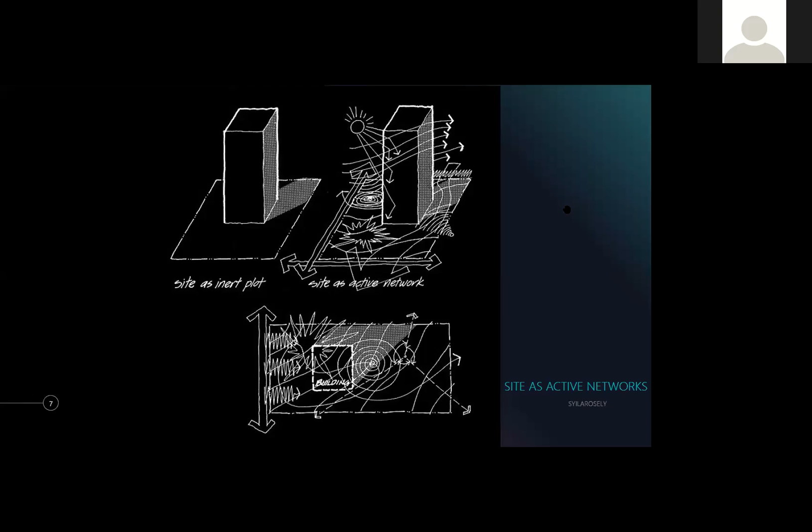But in your case, it would be the students, of course, which take up the mass majority population of a campus itself. And you would have the lecturers, the administration people, the workers that actually maintain the space. These are people you need to understand - how they work, how they use the space, what is needed. This is what you need to understand.

And the building - for the building, you would have to look at lighting, structure - what is the structure like, what is the floor like, what is the ceiling like, what are the mechanical installations like inside, what are the colors of the building. So these are the things that affect a building in a way.

And also the final part, you look at the site itself - the location, the contours, the drainage, the boundary, the trees, the walkways. So this is looking at nature and the existing things that you already have on site.

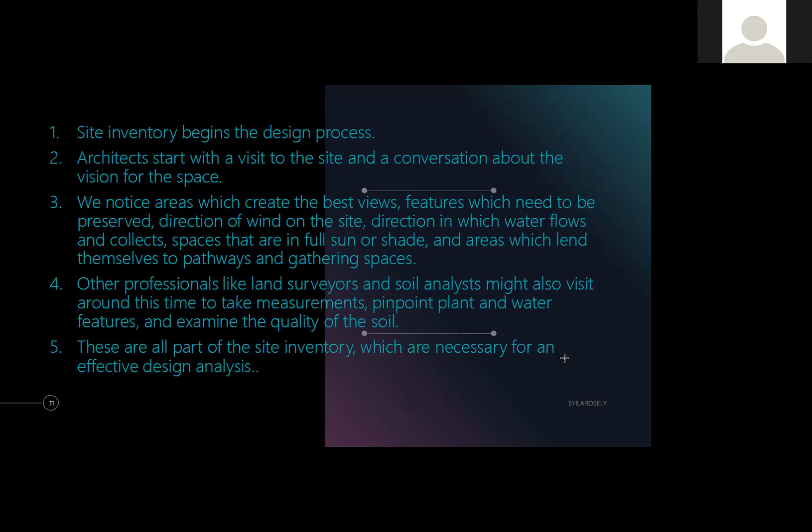You can also extract this and have it in their own format, extracting the sun path, site boundary, best views separately. So it's really up to you how you want to put it in your presentation.

So basically the important topics of study in a site analysis are location, neighborhood context, size and zoning. You would also have to look at natural physical features, man-made features, traffic and circulation, utilities, sensory, human and culture, and also the climate.

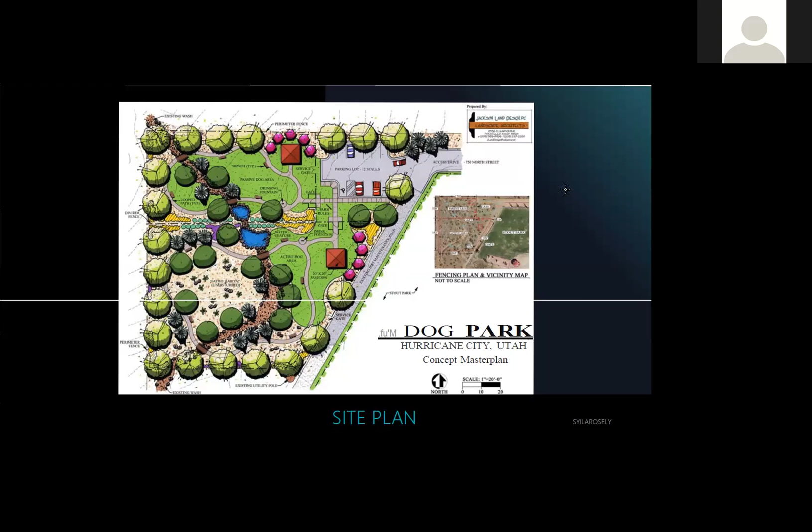Okay. Terima kasih Aja. Okay, so kita tengok next 2.0 neighborhood context. Neighborhood context is zoning of the neighborhood is important, and the information of this type can typically be found at the municipal planning department of the site. Local authority lah. Boleh dapat information tu. Apa zoning dia, macam adakah dia, you would also get like the plot ratio, the density, the height limit. You can, all this information you can actually get from the planning department of that particular site. So if you're building in Subang Jaya, it might not be the same requirements as you're building in Kuala Lumpur, for example. So how do you go about? You pergi dekat planning department for that particular area.

That's where you get information on what is allowed, what the zoning is, what the height limit is. If you build in an area that is near an airport, for example, you would have this limitation on height. Because when the plane actually wants to depart from the airport itself, they would have this flight line that it can't exceed. Because the plane needs to go up to a certain height to take off. So they limit the height.

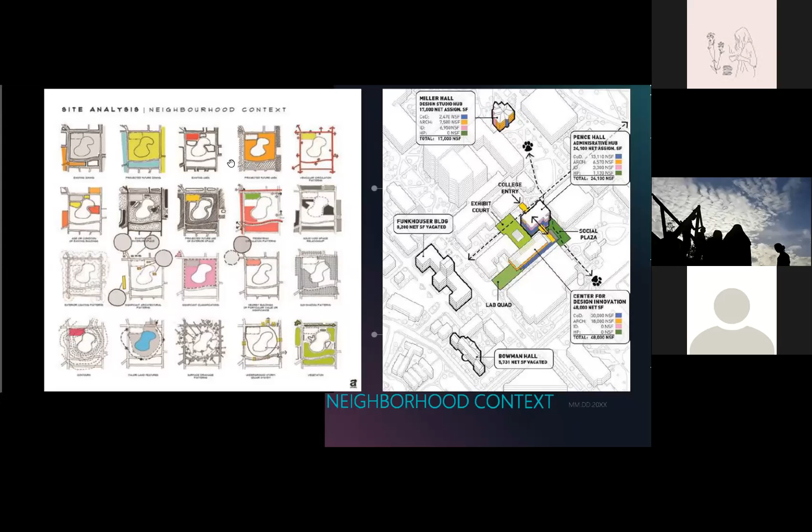So we won't go into detail. This is just how you can demonstrate it. Yeah, so you also look at site size and zoning.

Site boundary can be located by either verifying the dimensions physically or contacting the county tax assessor office or local authority. Okay, so you know how big the site is, but in our case it's already been demarcated by the lecturers. So you know how big of land you have - it's between 400 to 600 square meters, that's the footprint, and you can only build up to 2 stories high.

Okay, so your design would differ based on what the ceiling height is. Maybe the height will be different for your design. If you have a higher ceiling height, it'll be more different, and eventually it will have a different look.

Zoning classification, setback lines, height restrictions - this is what I explained earlier. Allowable site coverage, parking requirements - parking requirements in Malaysia already have a set calculation. So if you have this much land, this much plinth area, how much parking is actually required, and for different functions there's a different calculation.

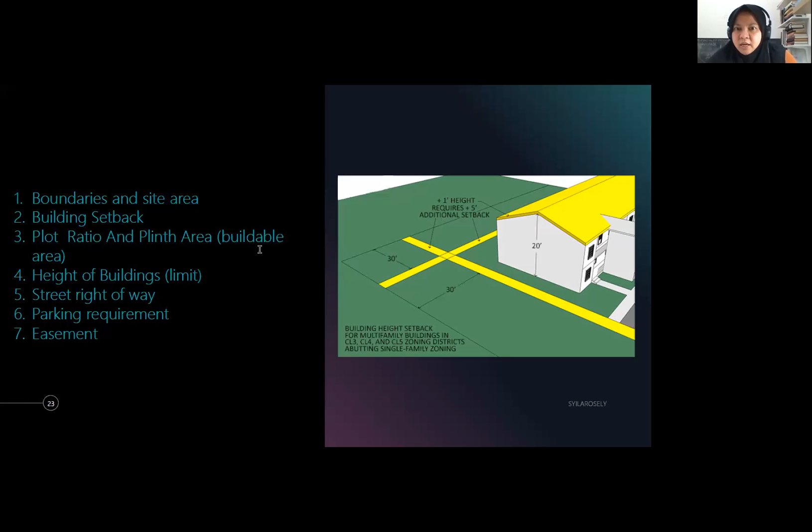It's very important that the developer provides according to what buyers actually want. For example, if you are developing in a transit-oriented development, your proposal would be different from a development where you do not have access to public transportation. So it will affect how you plan, how you propose. Parking lot, is it less? Maybe you provide less parking. Is that what the users would probably be accustomed to?

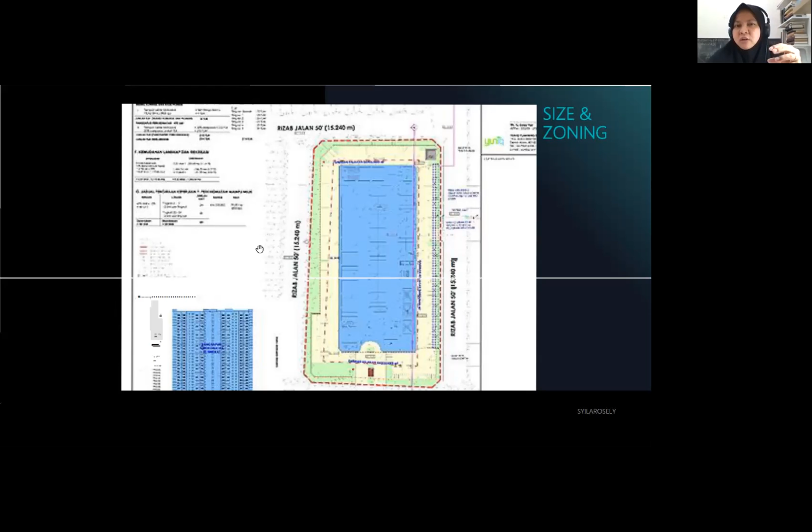So do you have a double entrance? Do you focus on one? How? Why? All of that will affect it. Will main visitors enter from one entrance and services from another, from the main road or from a secondary road? So that everything will affect how you actually arrange and design your internal spaces.

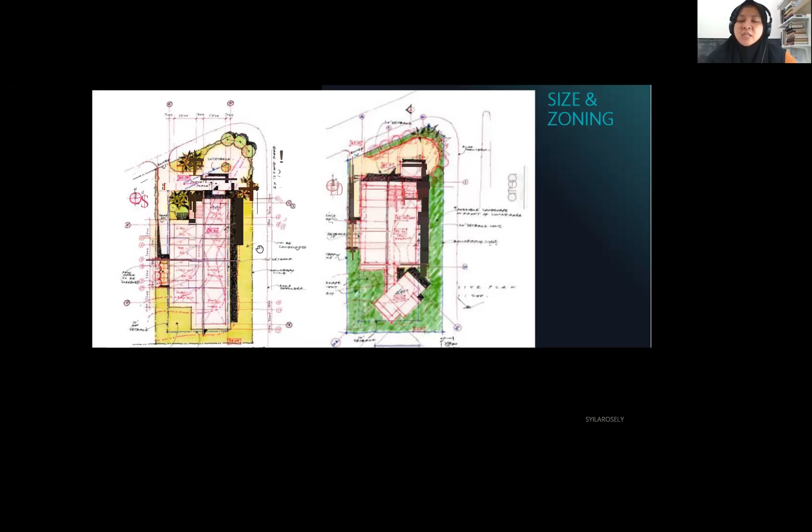Okay, natural physical features. Most of this information will be derived from the topography features of the site. A contour map of this magnitude can be located from the surveyor, the land, and then drainage problems as well. Existing natural features, you would get information such as trees, ground cover, ground texture, soil conditions of the site. You should also do a direct observation at the site itself.

So this is an example of how you can show your natural physical features. What is existing on site already? And if you're adding, you're planting more trees, probably you're proposing a water feature. So how do you do that? How does it affect the existing natural physical feature that you already have on site, for example? So this is how you demonstrate it on plan.

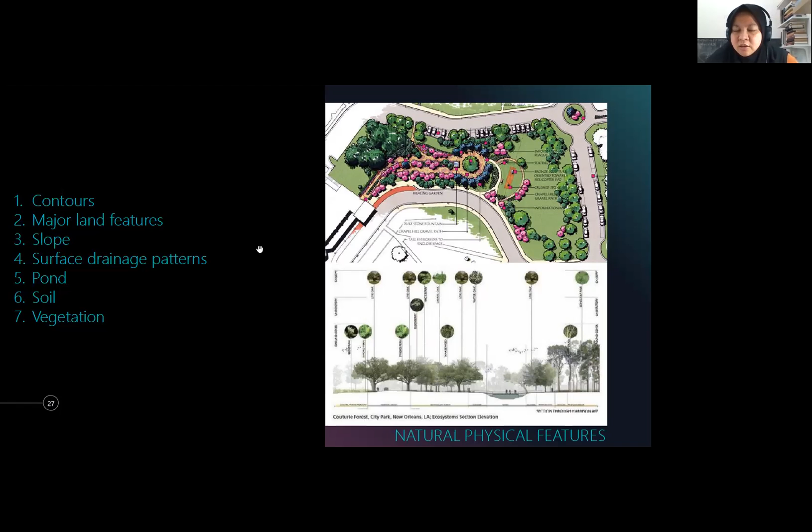And this is looking at topography, the contours. So each line represents a level, okay, showing you the actual condition of the contour at the site.

So how will this natural physical feature then affect your design? For example, if you're building on a contour, your building would have, from the right side top image, one entrance, and probably on the left side a different entrance. So it will affect how you enter the building, how you appreciate the building, how you appreciate the space.

And you play with the levels. You can see on the left hand side there, because they follow the contour, the floor level goes down. How do you take advantage of those levels? So this is what you need to understand when you look at the contour. How do you take advantage of that in your design?

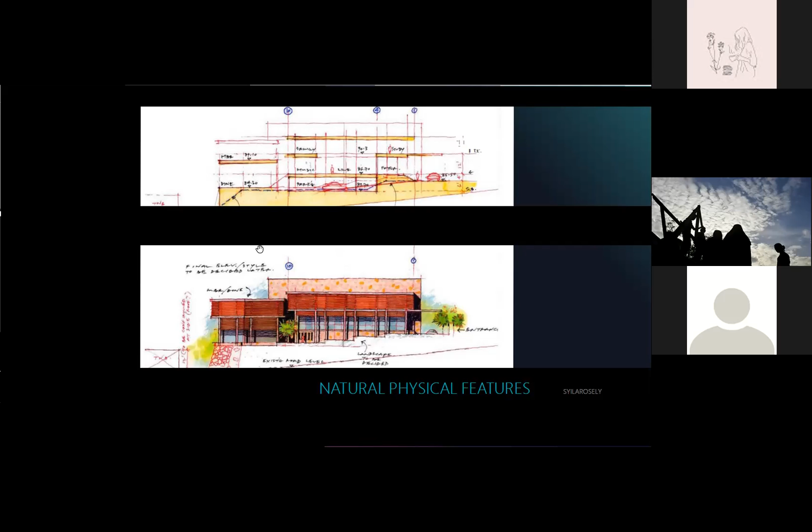Man-made physical features, point 5.0. Man-made physical features located on the site such as buildings, walls, fences, patios, plazas, bus stops - all of this is important, everything that has been built by humans around your site. The site and location of such features should be directly measured.

Documentation of the existing historical districts should be made, some of which may already have reports completed. Try to find out if there are studies people have already done. Can you make use of that?

Maybe you can add more to it, maybe it's already there, information available from previous studies. Locating this information can be done through municipal planning, that's one way too. But in your case, not so much.

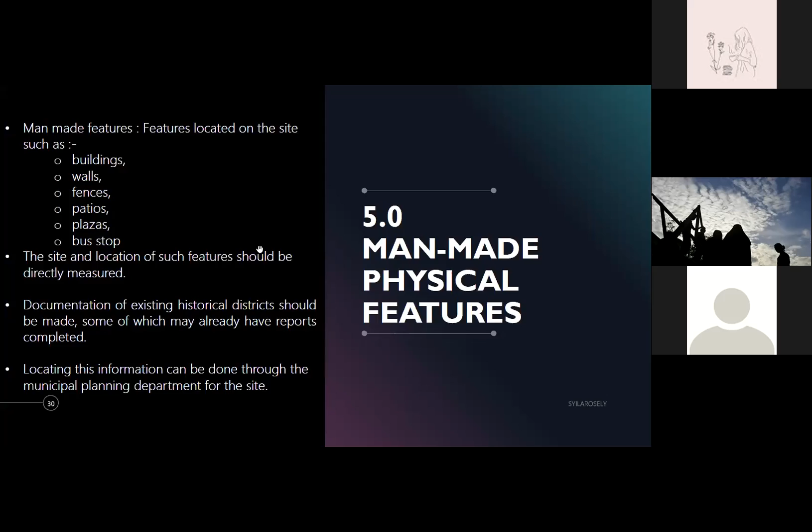Then for man-made physical features, we look at on-site features and off-site features as well. So you look at the pedestrian textures around your site, is there a covered pedestrian walkway, or is it open, how will that affect your design, and then you also have off-site features.

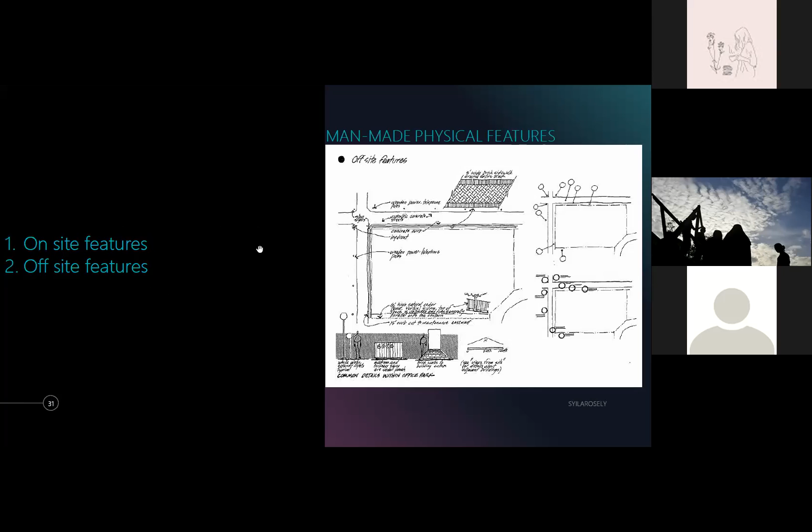So common details within the office park. You look also at where the visible lighting is, for example for the site, as well as street lights. That will affect how and where you position everything.

And then 6.0, we move on to traffic and circulation. The uses of streets, roads, alleys, sidewalks, plazas are important in this inventory step. It is not necessarily an analysis of this element, but more an analysis of what occurs on the circulation gateways. So this is a way that you can demonstrate traffic.

So the bigger the red is, or the bigger the line is, shows the heavy movement of vehicles on that road. That probably would be a main route that everyone uses, and you would have smaller roads which are less used. This is how you demonstrate it in your site synthesis, this is just one example.

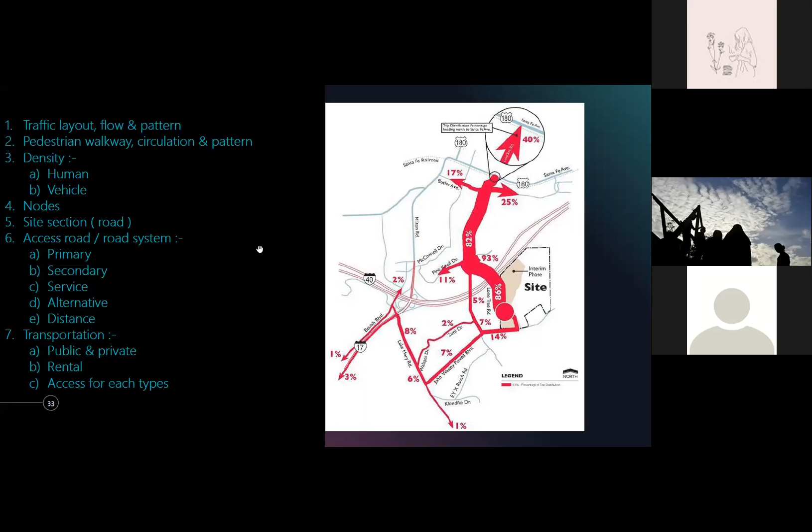Traffic layout, flow patterns, and then you look at pedestrian walkways, circulation and pattern, density, which shows you human and vehicular movement. That is also important. You show where the pedestrian movement is and where the vehicular is. What vehicular do you have on site?

Public transport would be your buses, which everyone rides from outside and inside, and then you also have Grab points, drop-off points for Grab, if it's for yourself. Where those places are is important, as it will affect your proposal later on. Would you want to propose a Grab drop-off point in your proposal, because there isn't one yet, for example? Then, what is the distance to the bus stop?

That is also important to show when you're talking about traffic. You can also note the site section, which is the road - I'll demonstrate later how you can show that in section. Access road, road system - you have primary road, secondary road, servicing road, alternative road, distance. All of this is important to look at as it will affect your design.

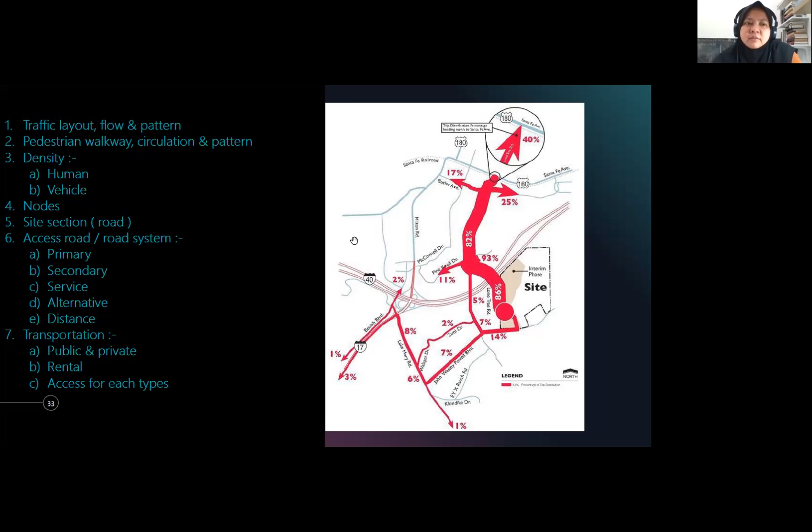Transportation, public and private, rental, access for each type. Is your access the same or is it different? Why? That will be reflected in your proposal later on.

This is an example of a site section for the road. This is important so you can see the relationship - you see the traffic zone, you see the parking zone, you see the traffic zone, then you see this buffering zone, cycling, and you see the parking zone, you see the pedestrian zone, and then the periphery and whatever comes after.

Also on the left side, you see it in a city, which is probably not relevant to yours, but it's important to understand because what's proposed here is just social inclusion, and it's a just system where you have mass transit options, you have pedestrians, and you also have individual vehicular options.

So you need to understand the reality and also propose a future how it could be. You can see through your design, so you also accommodate a waiting area on the left side, as you can see there.

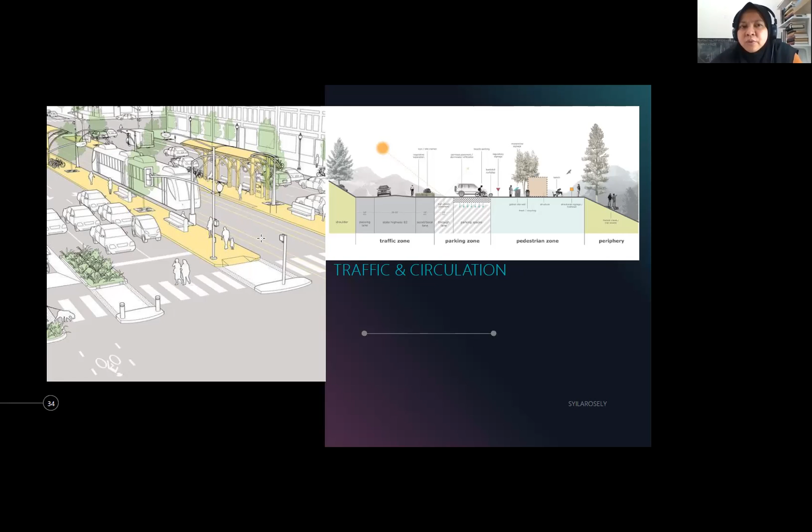So this is the proposal that we look at in your design. Are you proposing this as well?

Okay, utilities. So we look at utilities for site analysis. Information for utilities concerning the site can be found through the utility department and also companies in local areas. Generally the company has a set of drawings with this information needed. Information in this print includes the location of all utilities, around and on the site itself.

And sensory - much of the sensory information collected will be done through first-hand experience on site. The information is obtained from sketches, photographs, sometimes aerial photographs. Direct observation of other sensory elements such as noise, odor, smoke, pollution areas must also be completed. Because you are already familiar with the site, I'm sure this will not be a problem, inshallah.

Sensory - so this is how you can demonstrate sensory views into the site. When we look at sensory, you're looking at what you can see, what you can hear, what you can touch. So it's talking about these elements. View - what you can view inwards, what you can view outwards, is important.

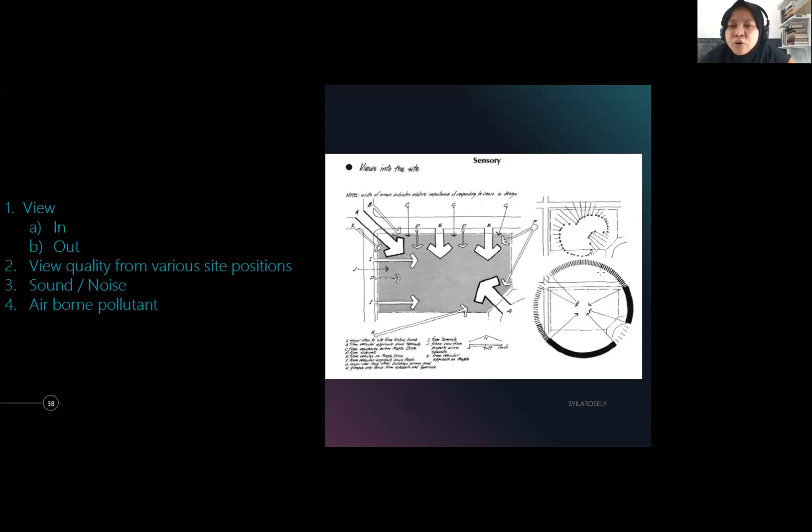Noise, and then you have airborne pollution - the strongest from the bottom left, crossing the site. So the density is shown through a much bigger arrow, for example. So this is how you show it.

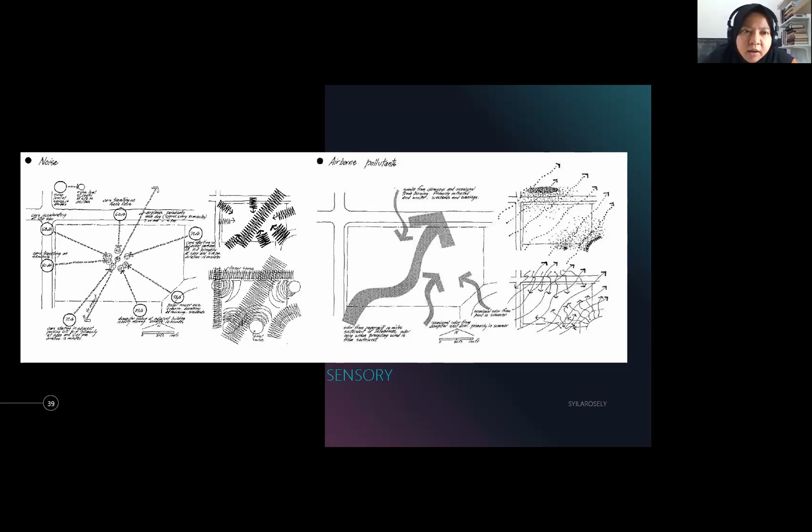Or you can also take the approach on the right, top and bottom - a different way of demonstrating it. So these are examples of how you actually demonstrate it.

And you also have to look at human and culture. This information can be obtained through census statistics, the census of the neighborhood.

If you're doing a neighborhood for USIM sendiri, sebab you all dah biasa dengan this area, so you sum up and you find information from the internet.

Human and culture. Information regarding these statistics is available from the local municipal planning agency. This information includes activities among people on the site and their relationship with these activities, human and culture. So we look at population, economic generators, what is the commercial, what is the services, and etc. You look at also the density, locals, the tourists, what are the races that we have on site, demography. And you look at also the activity during the day, activity during the night.

Okay, adakah pada siang hari je yang padat ataupun siang malam? Dua-dua padat tapi function dia jadi lain. So these are the things that we need to demonstrate when we're looking at human and culture. And you start zoning, and then you start understanding also the social issues that we have on site.

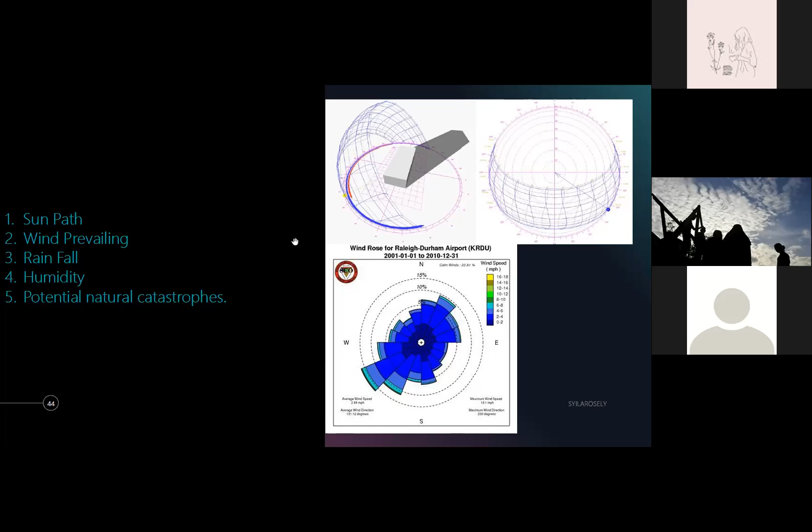And for example, taking Japan kan, Japan is actually diorang are on gunung berapi, they have a lot of earthquakes. So the structures of the buildings, the technology that they propose actually can absorb that shock to an extent lah. So if it exceeds the extent, the building will eventually jatuh jugalah. But they understand that usually it's this, that is the ni. Lepas tu they allow at the jointings kind of like an absorption of that. So it's looking at how you have the condition and apa technology structurally you're proposing.

So that is looking into natural catastrophes lah. Tapi for USIM kita tak ada kan, kita bukannya berada di gunung berapi punya line, alhamdulillah kan. Tapi we have a lot of rain. So how then? We have a lot of sun.

So how do you take advantage of that? Okay, and we also have high humidity kan. Kita punya condition kan, lepas tu berpeluh kan. So how do you do that then? How do you take advantage of strong wind as well?

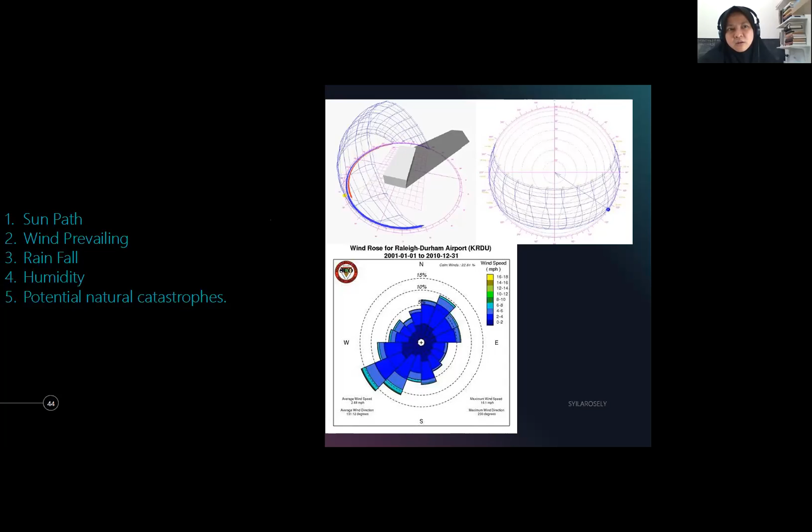So what is finally, then, from everything that was presented just now, how do you then do synthesis? And so synthesis ni is defined by other people in all sorts of ways. Cambridge Dictionary says that synthesis is actually the production of a substance from simpler materials after a chemical reaction.

Okay, from satu benda yang asas, lepas tu ada apa ni? Ada hubung kait and then ada chemical reaction, ada tindak balas di situ kan. Lepas tu Oxford Dictionary pula dia kata the combination of the components or elements to form a connected whole. The synthesis of intellect and emotion in his work, often contrasted with analysis.

In general, analysis could be defined as the procedure by which we break down an intellectual or substantial whole into parts or components. So it's actually from something that is obvious, you start breaking it down, breaking the components down.

Synthesis is defined as the opposite procedure, to combine separate elements or components in order to form a coherent whole. Examples: view through site, wind, rainfall, sun path - these are all site synthesis and site conditions.

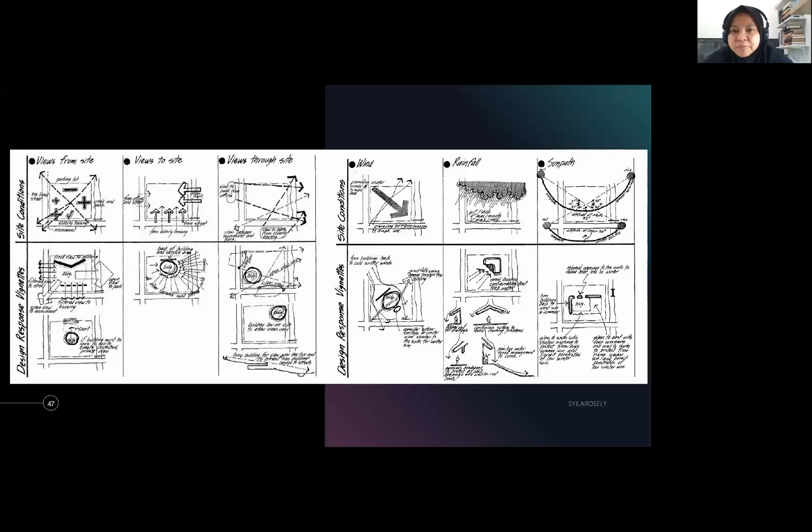In your individual proposals, you would have to respond - design response to the context, rationale of having your building, how, where, and why. It shows site condition on top - you don't have your building yet, it's just understanding what the site is and what is on the site. The bottom is when you position your building - why, and how are you taking advantage of the site condition?

Finally, you would have to do SWOT analysis. SWOT analysis is a strategic planning method used to research external and internal factors which affect company success and growth. Firms use SWOT analysis to determine the strength, weakness, opportunities, and threat of their firm, for example products and competition. Similarly, architects use this as well.

We look at strength - the current internal positive factors that exist within the site. Opportunity - future external positives, factors that exist or might exist within the site context or surrounding areas that will have effect on your project. Weakness - current internal negative factors that already exist within the site itself. Threats - future external negative factors that exist or might exist within the site context or surrounding areas that will affect your site. SWOT analysis is very important.

Again, diagrams - I'll just go briefly through this and attach it later so you guys can have a look back. Ambient conditions, open spaces, views, pedestrian circulation - this is how you demonstrate diagrammatically. Then you have a study of contour, and you see through section and relation from the diagrams - relation between diagrams, referent drawings. So you have initial diagrams and later refined diagrams, probably showing relations between diagrams and border.

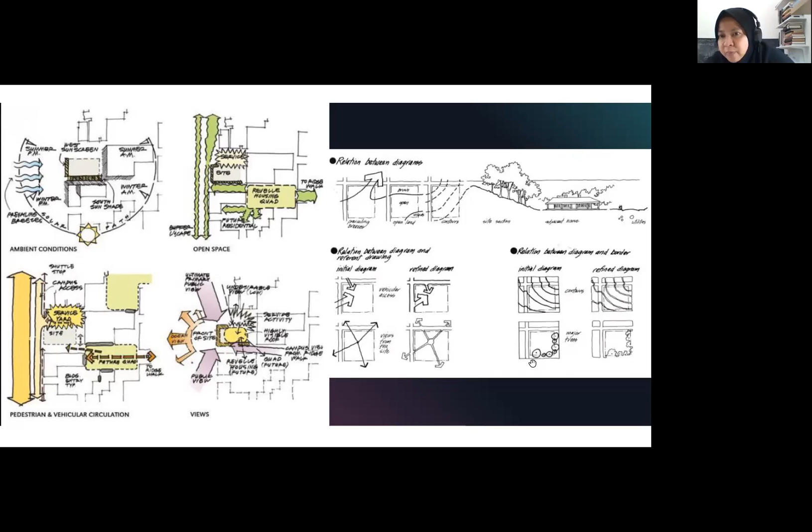Again contour, and then you also have major trees on site. This is site use components - this is how you can sum up or start designing and rationalizing why you want things where. So site use components - access to parking, building entrance, outdoor play area, parking, service courtyard. You have the covered play area, overlooking play. This is an example of a particular building.

Then you start looking into form - where everything can be positioned and how will it affect the design. If you position it here, what happens? If you position it there, what happens on plan? Then you start looking also in section - if you have a contour difference in height, how does that affect things? Probably your entrance would be from the top or from the bottom.

Why? And then you have also site use alternatives - develop facade in response to movement, develop corners in response to monuments. Is it really positioned at the corner? Is it perpendicular to the corner? It will give a different impact and effect on how movement is on your site and how you appreciate the building itself.

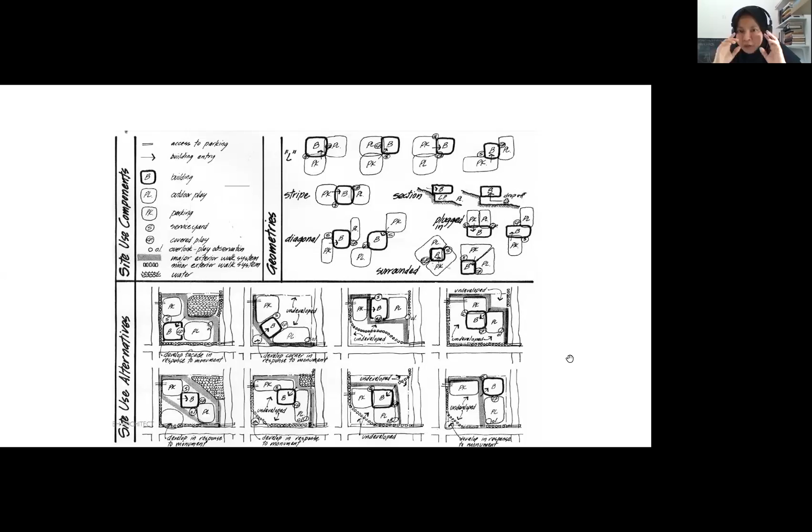Kita visual adalah sangat important. Bila kita nampak orang, it gives us a different feel. Dengan kalau the building is designed in a way that you can actually see people, and masing-masing masuk ke bilik masing-masing kan, so it's different feel.

So this actually is our role as an architect, to actually design and formulate a solution to best for the betterment lah. So understanding the students' needs, how you can actually achieve that is important. So if you look at examples of student unions overseas, usually it's a shared space, very open, very public.

And lepas tu dia ada pula like this amphitheater or kind of like stage where probably events can happen, ada presenter dekat depan, and students can actually come and sit down and listen, and it's always like public, sebab it's like the idea of having ideas shared, dissecting, disseminating knowledge, that idea is there.

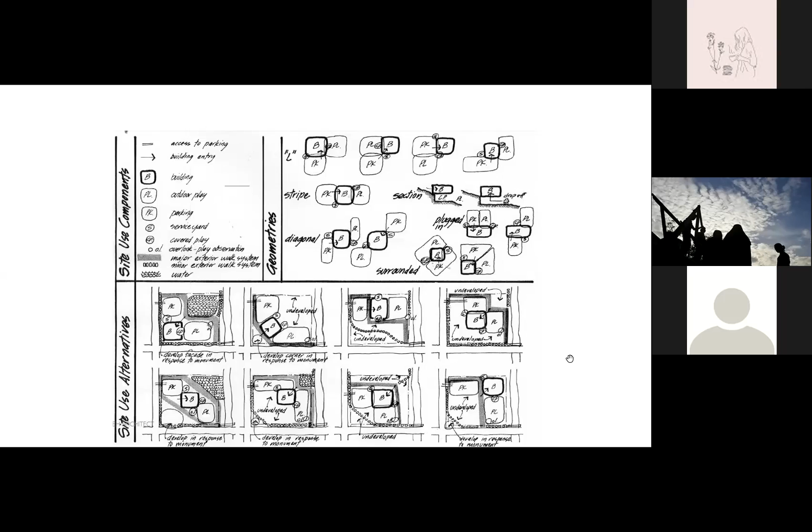Okay, so it's like an open discussion, like siapa-siapa je boleh join, for example. So you have it very public, but also you would want areas which are more private discussions, maybe serving a different function. Okay, so understanding apa yang korang perlu dan apa yang, how you best propose that is important.

Tu site model, of course, site model sangat penting, and it's part of the requirement that you need to propose later on, whether it's virtual ataupun physical. Yang pentingnya ada, dan you can actually put your design in later on.

So I remember during my final year dekat when I was doing my part 2, we actually cut the planks of wood ni pakai laser cutter, like each and single ni. So what we did was we actually had to draw each piece in AutoCAD, lepas tu send it to a laser cutting machine. So that's how detailed it is.

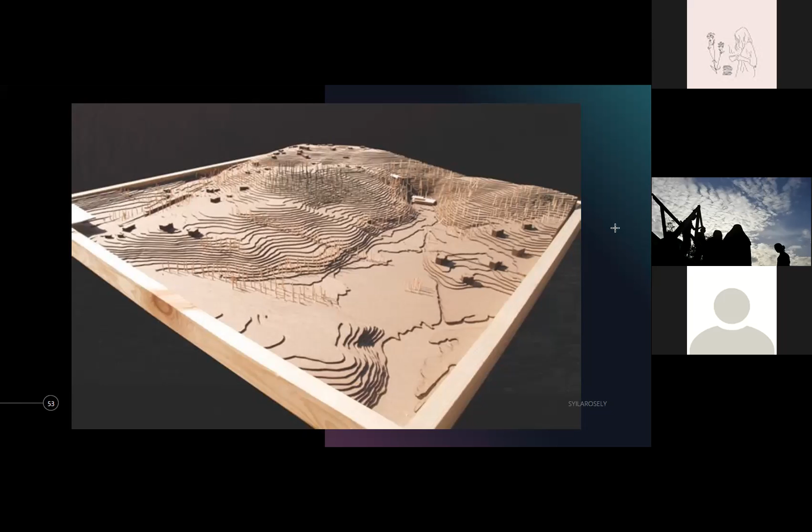So in architecture, of course, workmanship is really important. Apa ni, quality, ya. InsyaAllah. This is an example of using cardboard, which can also be done, which is more simple and easily accessible. You just use your cutters and material cardboard pun senang nak dapat ke mana-mana.

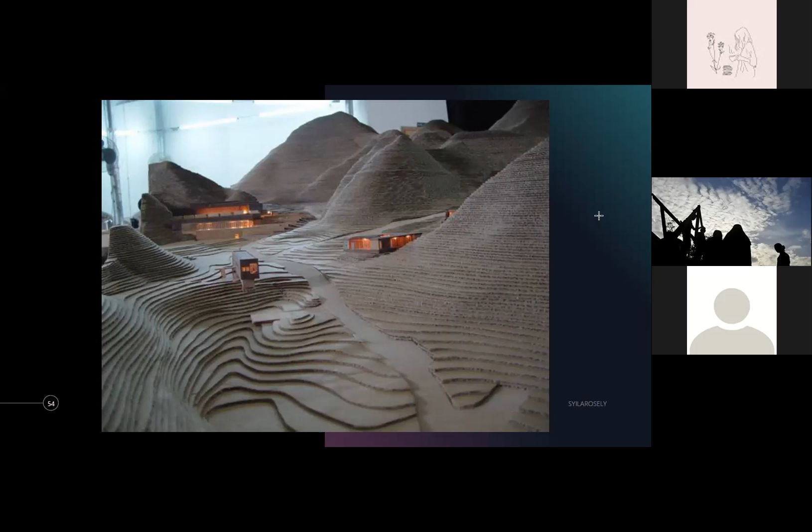So what I want to say here is just be creative with material. Okay, we would have a lot of options of material. Jangan kita tengok sini kita pakai ni kan, oh cantik, tapi kita tak berani untuk mencuba nak try material lain. So insyaAllah beranikan diri. If ada you tengok sampel kat tempat lain buat guna box board ataupun they carve guna 3D printer, so you want to try that, try it. So let's push the boundaries and think out of the box, insyaAllah.

So last kali, every group project in school that we have ever done, of course, kita datang daripada different backgrounds, kita datang daripada different school of thoughts, kita datang daripada different basically understanding of things. And so how do you make use of that?